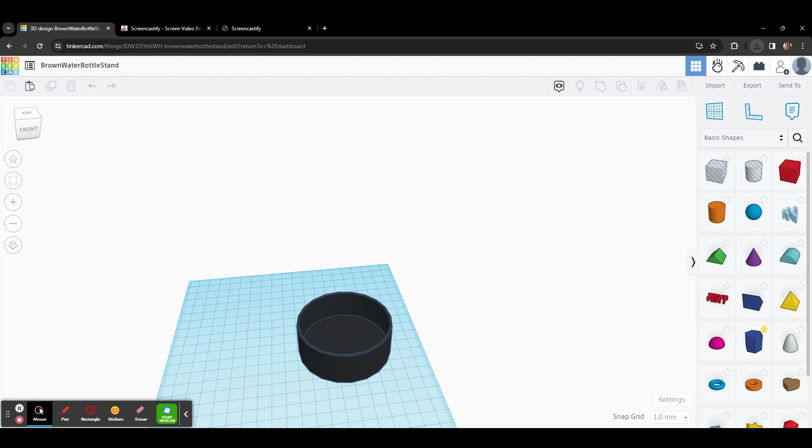Now that I downloaded our STL file, it pops up at the top of my screen and shows the brown water bottle stand. Now that we have our model exported from Tinkercad, we're now going to put it into our slicer. A slicer is a tool that cuts a model into layers and turns it into G-code, so the 3D printer can read the G-code and make your object.

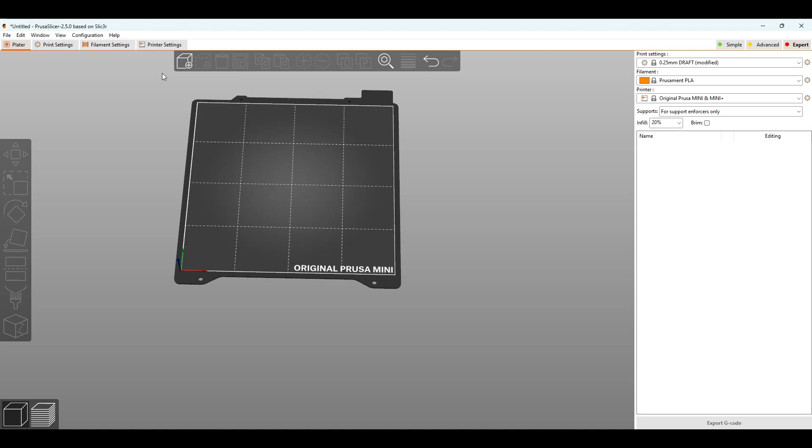So first, we're going to go up to the corner and click on the white box with the plus sign. Then you're going to find the file that's an STL and open it. Now we have our file on. I'm going to go through the tools on the left first. The first tool here moves it around the print bed. The second tool can make it larger or smaller depending on what dimensions you have.

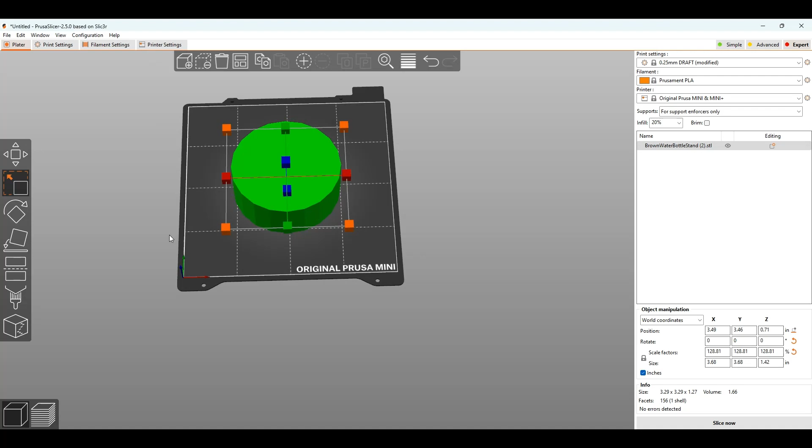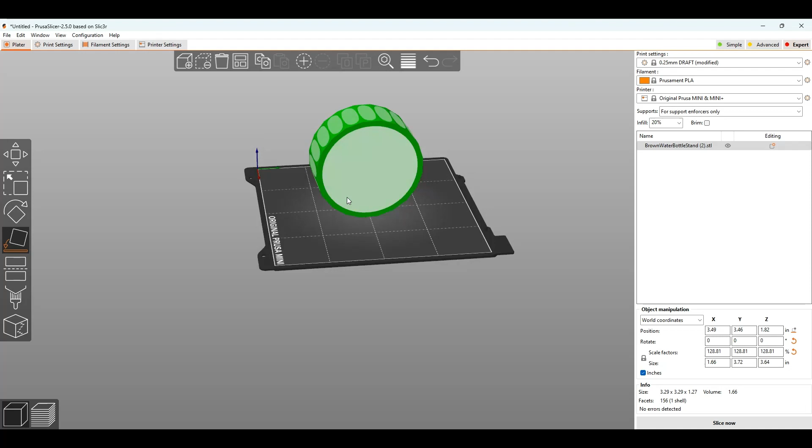The third tool here is a rotation device. This can help you maneuver it into the positions you want it to be in when you print and to lower print time. Next is place on face. This is almost the same tool, but it's easier. You click on one side of the thing and it goes there. So I'm going to click right here and it's going to go there. Click here and it's going to flip over.

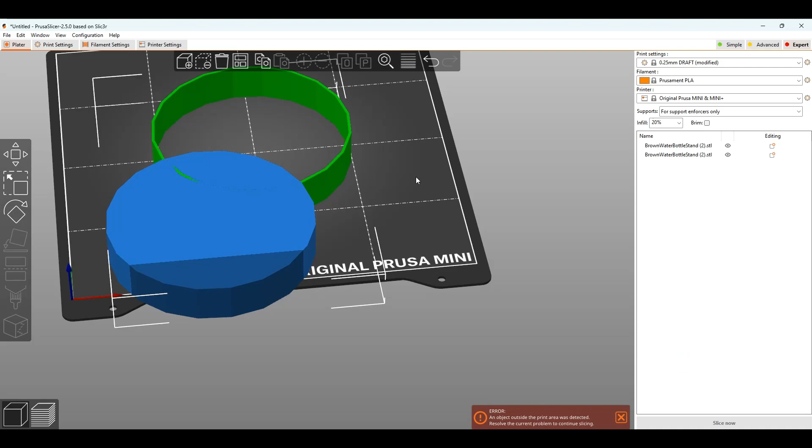The next tool is the splitting in half tool. This tool is helpful when your part is too big for the printer to print. So you're going to perform the cut like this, and now you have two parts. Now that you have two parts, you can move them across the print bed, or you can print it in two different parts. So now I can print the same part, just it's cut in half so I can print it faster.

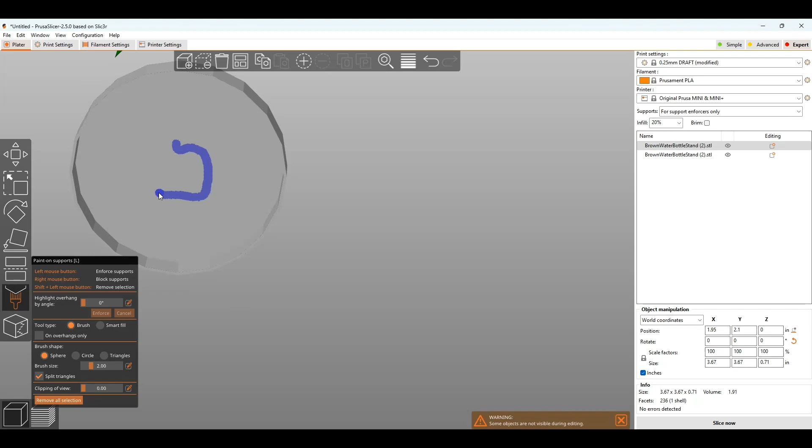Next is our paint-on supports. These are very helpful if you want to make your own supports. So first you're going to draw. So I'm going to do this squiggly line. And you have to make sure it's for support enforcers only on the other side of the screen. So when you slice it, it does custom supports just for that.

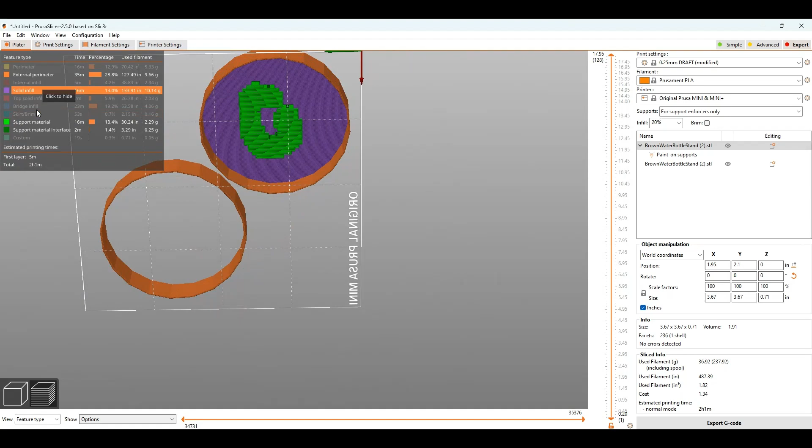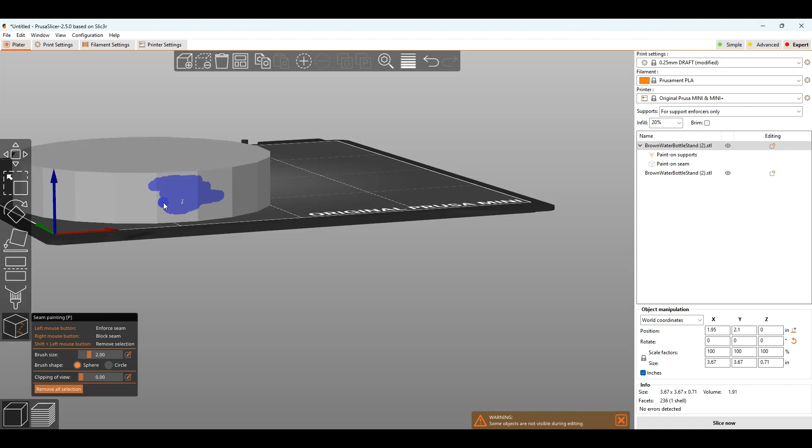So now, what I'm going to do is I'm going to go back to our old shape by pressing the undo button, which is a helpful tool, and we're going to keep it there. Now going on to the top. So we have add a shape, delete a shape. This is delete everything on the build plate.

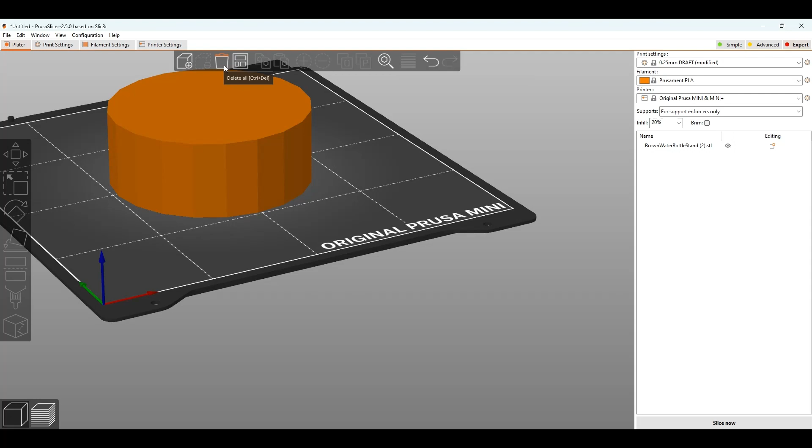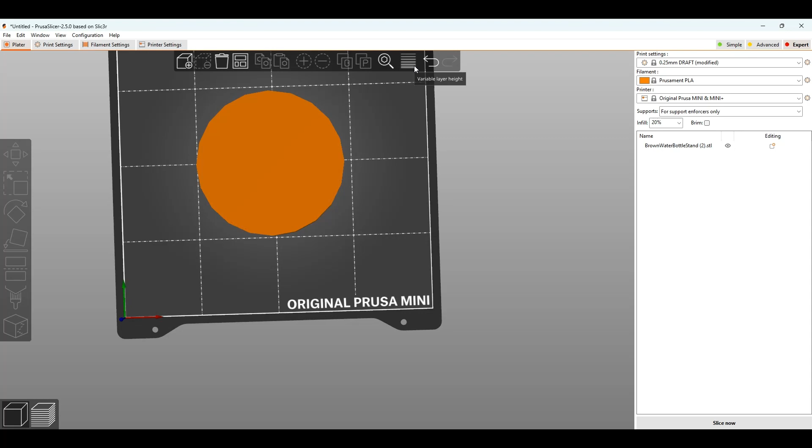This right here can arrange your shape so you can have it in the most effective position possible. This is copy, this is paste, this is add instance, and this is subtract instance. And then this is split to objects and split into parts. And this is search, and this shows the different layers. And this is undo and redo.

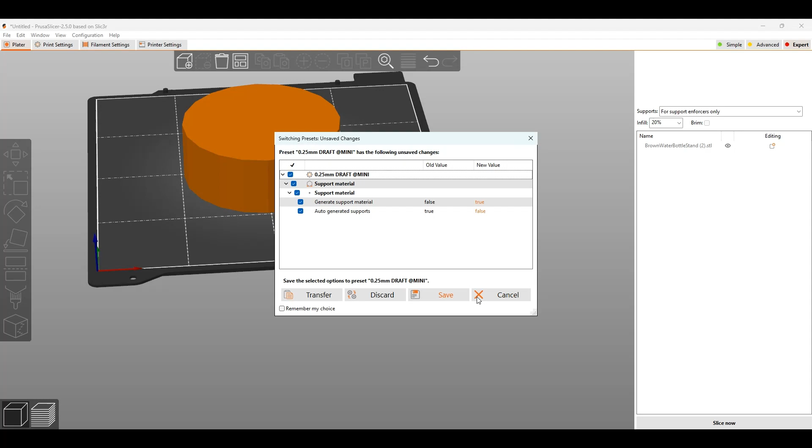Next is filament. There's different types of filament, and this helps you provide the cost of the print so you can see how much you're paying for and what you get out of it. The next one is printer. I have an original Prusa Mini, and this slicer is a Prusa Slicer, so it only works for Prusa. So I click on my Prusa Mini and then I can go next.

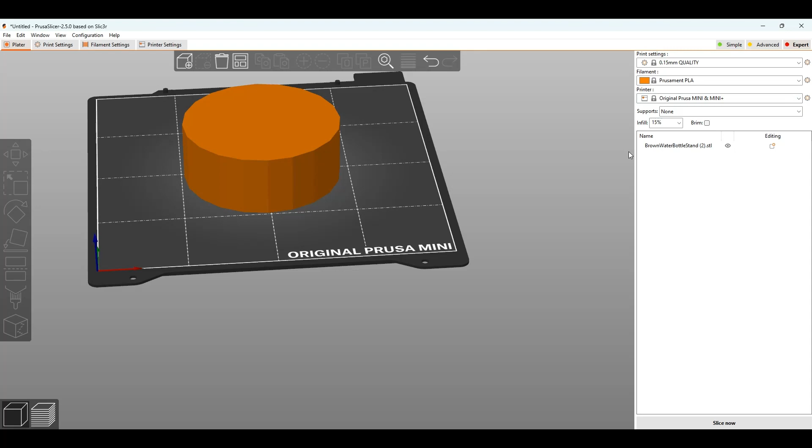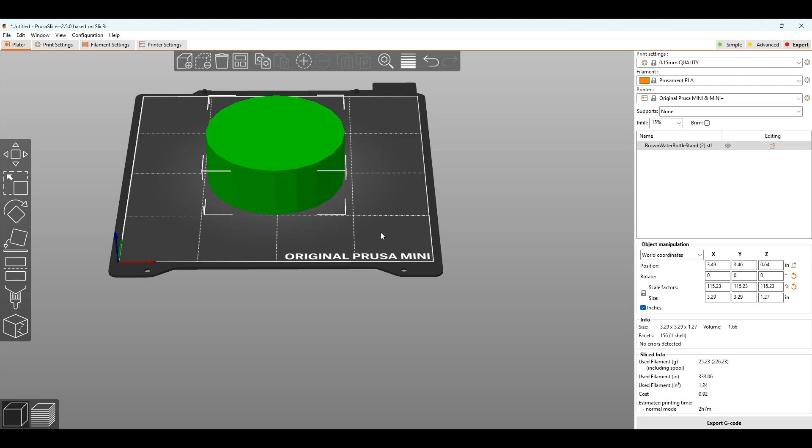Supports. This is crucial. If you press none when you slice it, it gives you no supports, even though you might need supports. So I'm going to slice it. This model isn't working. 1 second. And I'm going to slice it. So I have to click on them, and now they all reappear. So now this is our print.

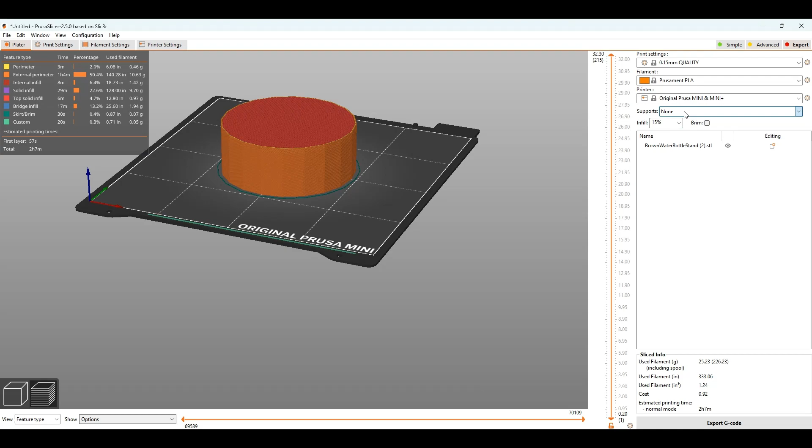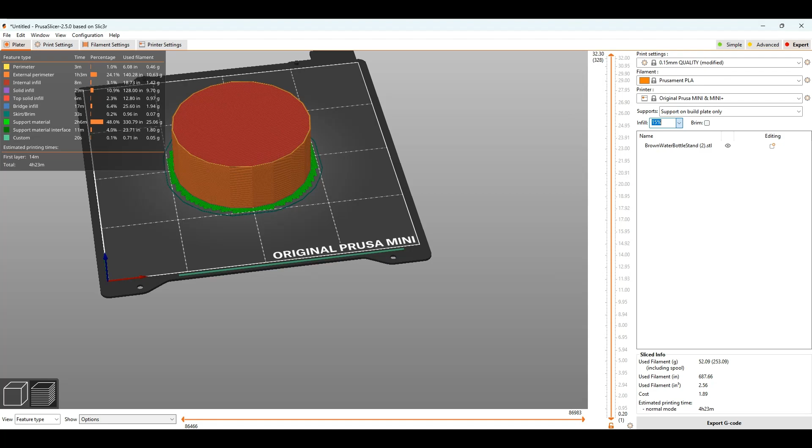Next, we're looking at infill. Infill is the density of the filament and the amount of air left in the print. Going to 100 means you're completely doing a solid print. Staying at 15 to 70 means you are hollow, and 0 means you have no infill. And brim is a feature which you can add, and basically what it does is it adds a circle around your print, so if your calibration's wrong, you can stop the print before it starts messing up.

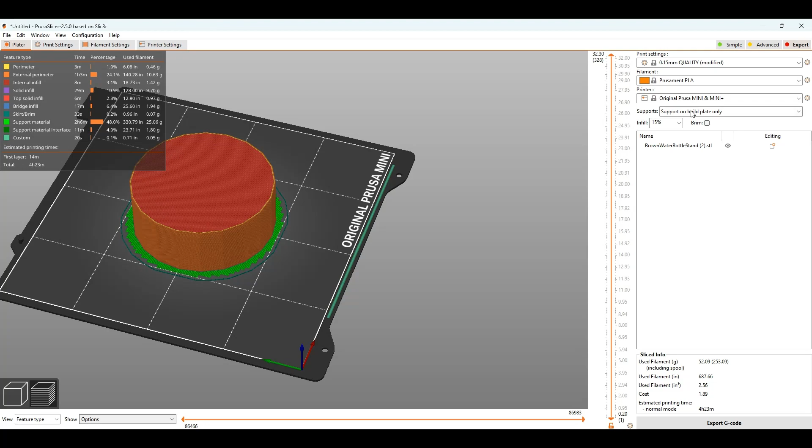So now I'm going to slice the print, and it's going to show at the bottom the used filament grams, 52 grams with the supports. But if I take out the supports and slice it now, it's going to be 25 grams. And used filament in inches is 333. Used filament in inches cubed is 1.2 inches. And the cost is 92 cents for this piece.

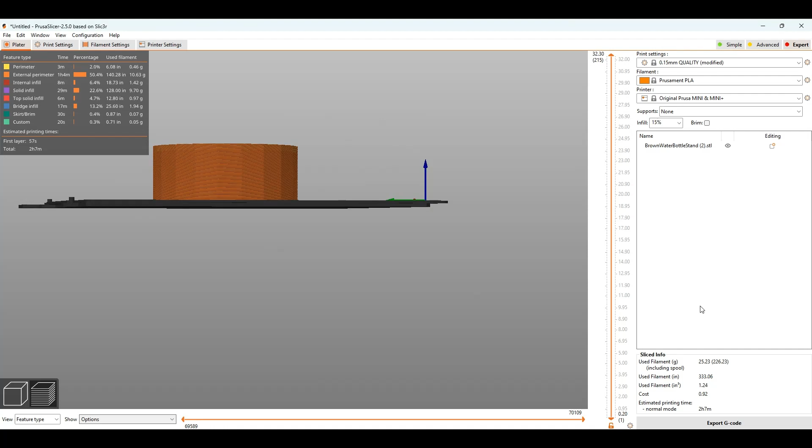And the estimated printing time is 2 hours and 7. And I can speed that up by going to 0.25 millimeter draft. I'm going to save that. So now when I slice it, it's going to be 1 hour and 13 minutes.

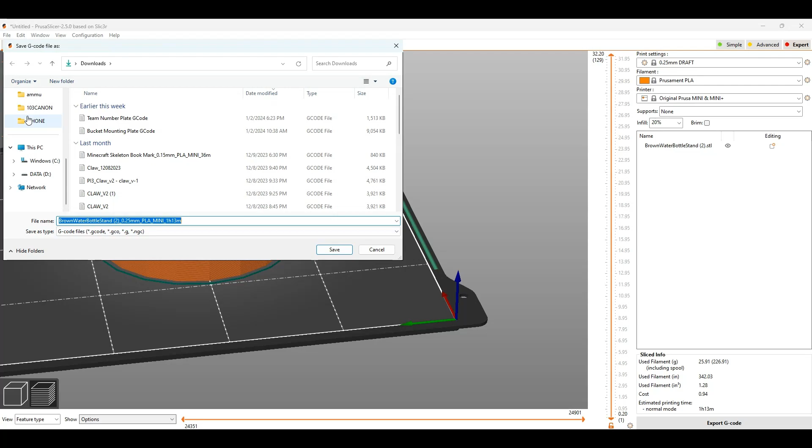Now that we finished slicing, we have to export our G-code so we can send it to the printer. What you're going to do is you're going to press export, and you're going to find your drive. You're going to go to iPhone, we're going to save it here. So now that we have our file exported in the G-code form, you're ready for printing.